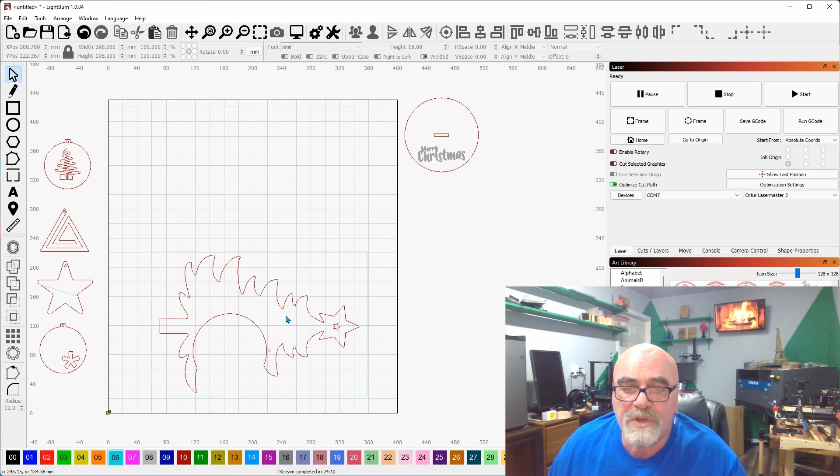All right, so here we are. Now this is the file that you'll get for free when you download it. This is the Christmas tree here, the standalone Christmas tree. This is the base up here. This is a little etching that says Merry Christmas, and engraving.

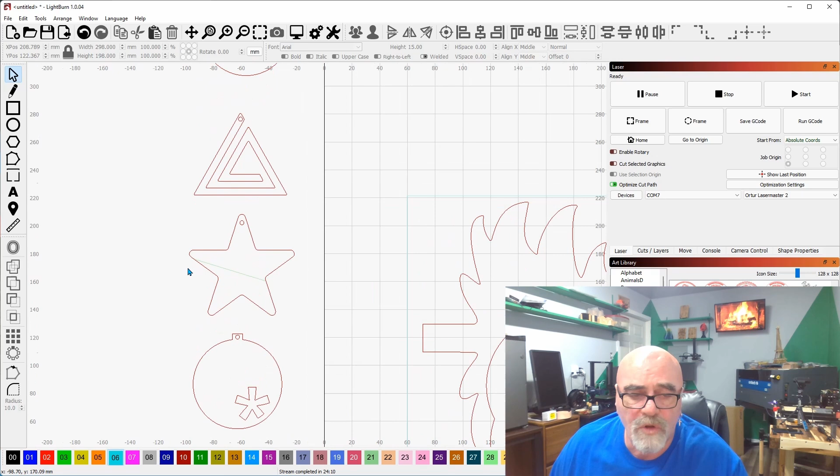Everything in red is going to be cut out. Let me move this over a little bit. I'm going to hold down my mouse wheel and drag to move the bed around. And if I zoom in by rolling my mouse wheel up, you'll see there's a little green line right here on this ornament, the star.

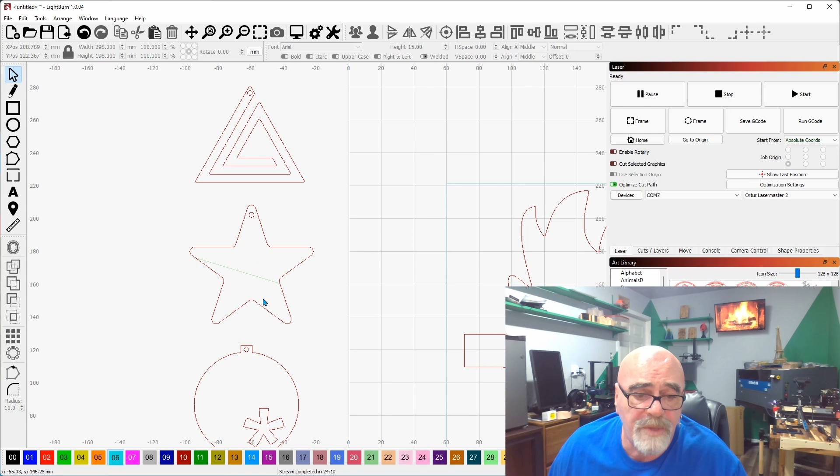That's just a reference point. It's going to engrave, but it's just a reference point so that you can paint the top green and the bottom red, or you can use some flocking in different colors or whatever. These little holes here are 3mm. These are the ornaments, you can choose from whichever one that you want.

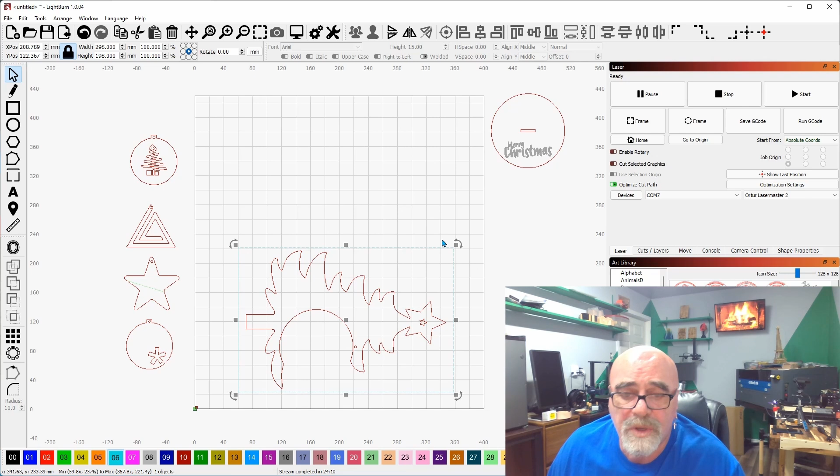Here you'll see that I've got this arranged sideways, and also you'll see that this box right here is my framing box. I'm going to include this with the actual download so that you have it as well. And the best size wood that I've found here is 300 by 200mm basswood.

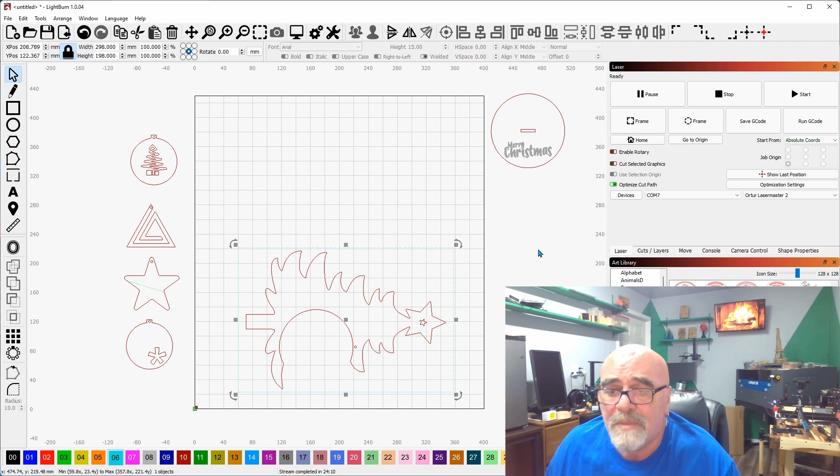So if you look up here in the top where it says width and height, I've set it to 298 by 198 to give me a little bit of extra room. And then when it's time to frame, I'll run — I have the cuts and layers set over here.

And if I right click on this, you'll see that flash. This one here is set at 1400 speed and 0.05 power, which is nothing — okay, it's enough to turn on the laser so that you can see. I also have this set to 3 passes.

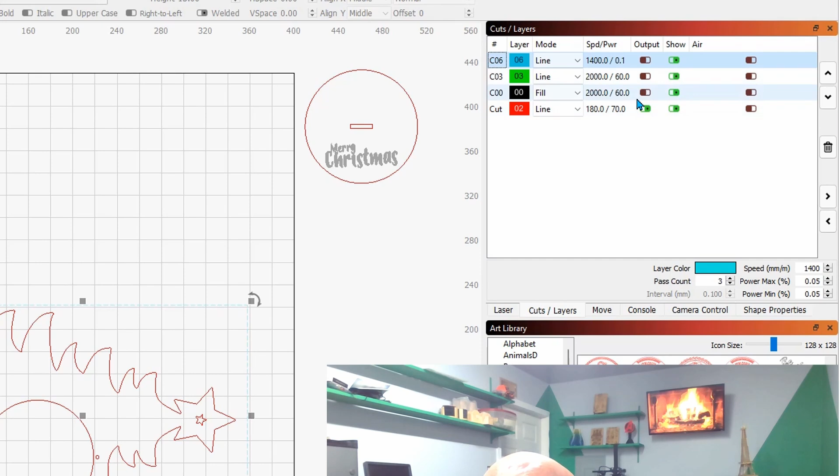So what'll happen is, with all of the outputs turned off, just this one output turned on for this line, I'll start the job on the laser and it'll start moving around, just barely lighting up the laser, and I'll know how to position the wood.

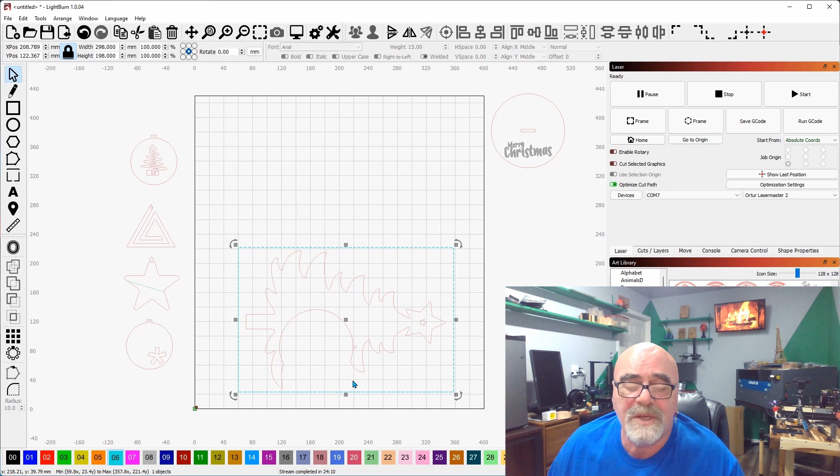I have a pretty good idea of where to put this because I've got my honeycomb bed and I know exactly where this is going to be from the grid. So I'm going to go set that up and we're going to get this ready to burn.

Now this will be the first piece right here. And then what I'll do is I'll go ahead and grab this piece, the base. I'll set it on here, get rid of this one. I'll make 2 bases so that I can glue those together. So I know that it's 4mm thick, and that's probably about where you're going to want to be.

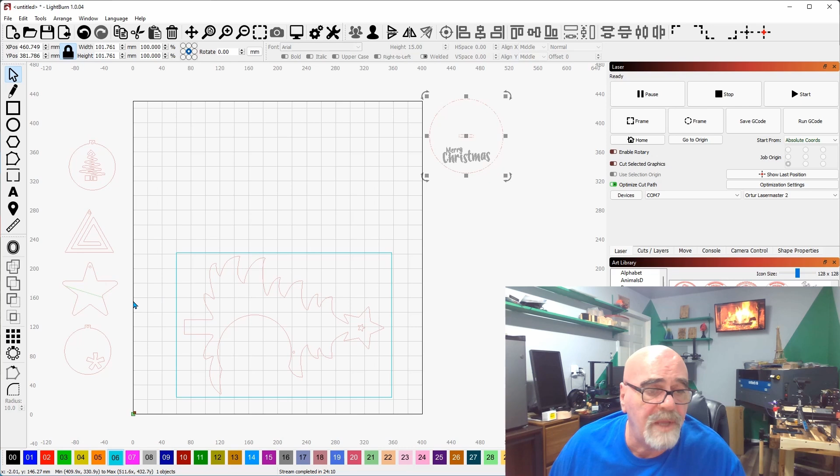And then I'll grab 1 or 2 of the ornaments over here and also put them inside here. So we'll be able to cut the tree first, then we'll cut the 2 bases that we'll glue together, and then we'll cut one of these ornaments. I'm not sure which one I'm going to do yet, maybe I'll do 2 of them.

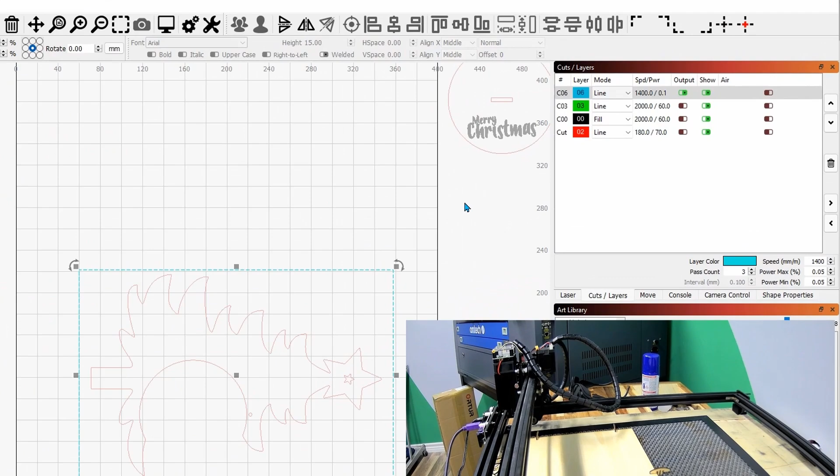So let me go ahead and get that set up and get it ready to burn, and I'll be right back. All right, so I've got the project set up now, and as you can see, I've turned off the output for everything but this line.

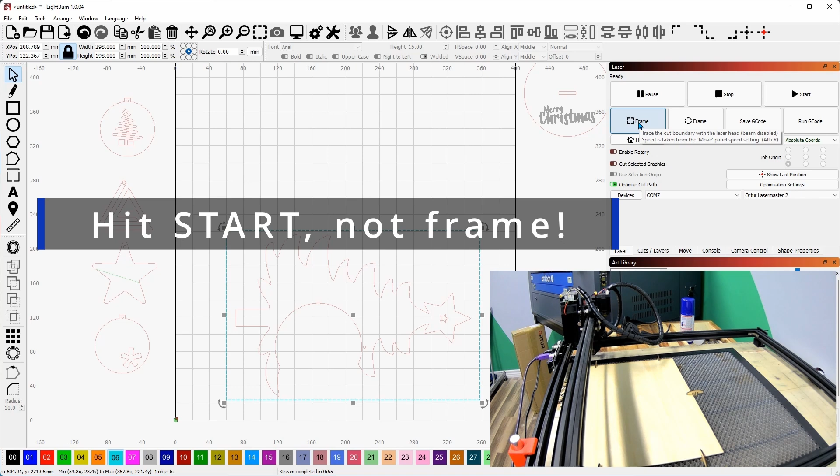If I right click on it, you'll see it flash down here. This is my frame, my 300 by 200, which I actually made 298 by 198 just to be safe. I've gone ahead and put my Christmas tree in here. Now I'm going to come over to the laser and frame it, making sure it's lined up perfectly. I think I've got it pretty well lined up, but let's take a look and see what happens.

Actually, I'm not going to frame it. I'm just going to start the job, because I've set this up in line mode with 3 passes. So let's just go ahead and start the job, and it's at 0.05%, so it's perfect for framing. I'm going to hit start, and let's take a look.

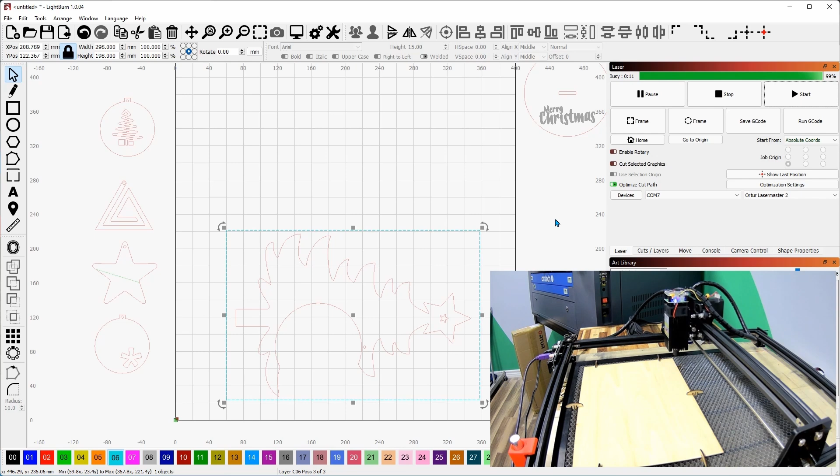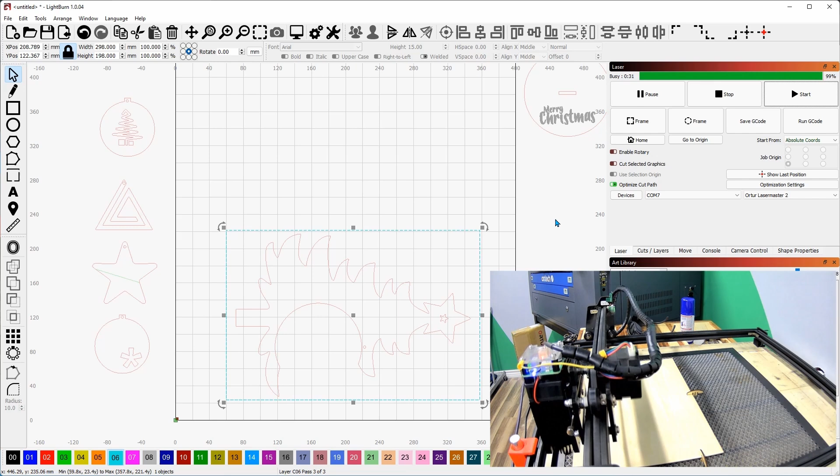All right, so that looks pretty perfect just the way it is. I don't have to do the 3 passes. If I did have to do it, all I would have to do is move the wood right now as it's going around in 3 different passes. I'm going to hit stop, and it's ready to cut right now.

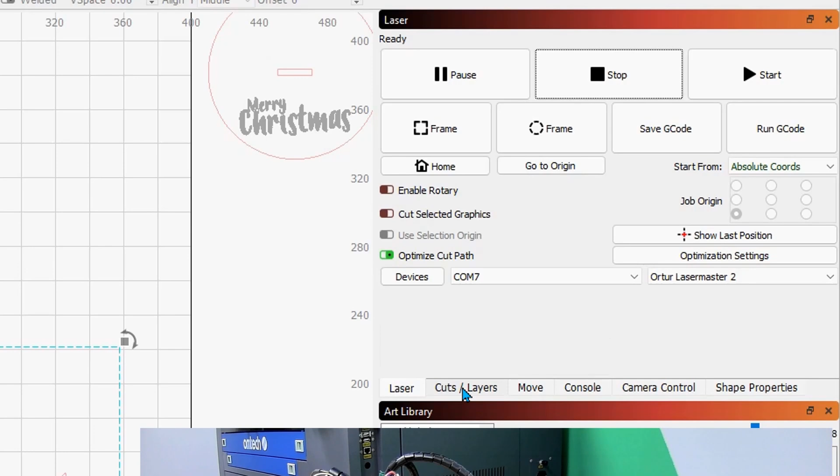So let me come back over here to laser, cuts and layers, and let's turn off the output on that one. And let's turn on the output for the cut, which is going to be this one here. Ignore everything outside the bed because it's not going to do anything at all. So now let's take another look at this.

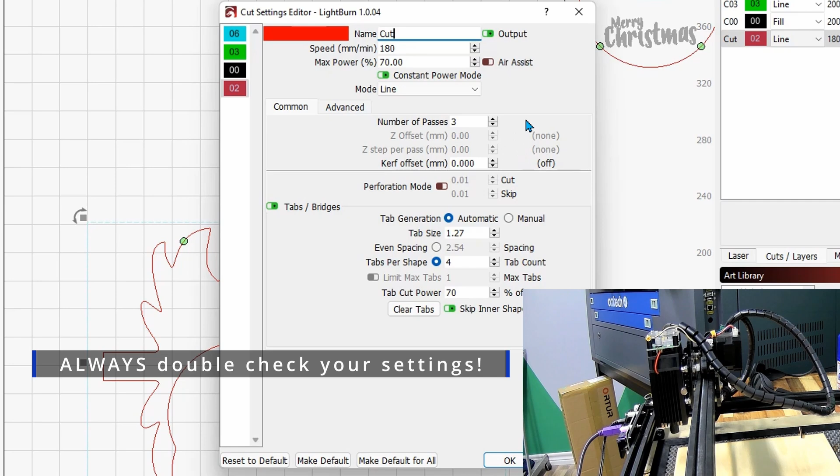So again, I've got 180 and 70 because I've done my power scale already. I've got it on 3 passes because I know that's going to give us a good cut through. And I'm going to turn off tabs and bridges - I don't know why that was on, that's a mistake, that was from a previous job. So now I'm just checking everything to make sure everything's right, and I'm glad that I did because I had tabs and bridges on.

So we'll go ahead and send this to the laser and see what happens. Hopefully it's going to cut out perfectly. Let's hit start and see what happens.

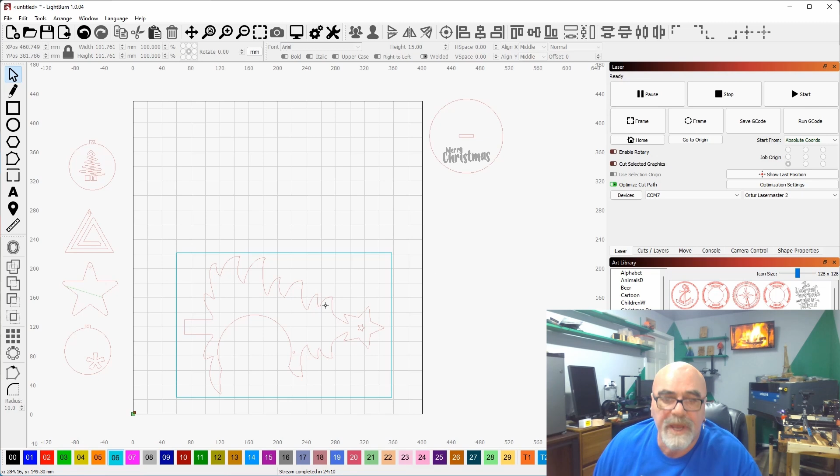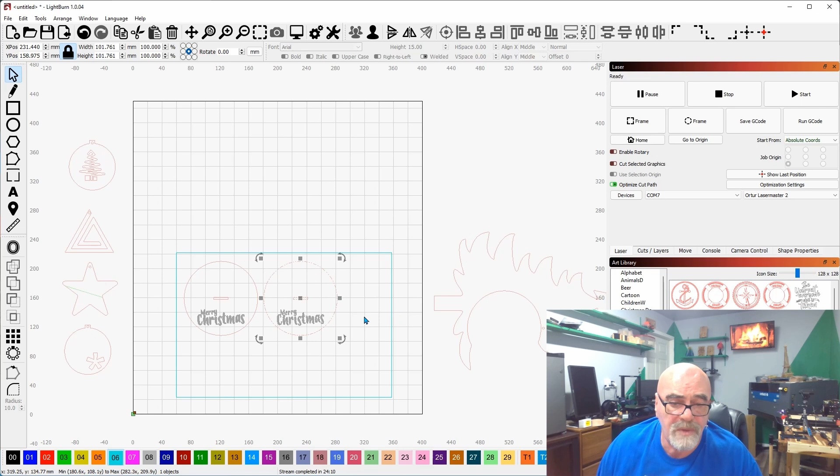All right, so we've got the tree cut out. At this point, what I'm going to do is select the tree and drag that off the workbed. I'm going to come up here and drag the base down here. Now, with it selected, I'm going to press Control and the letter D, and that duplicates it. Now I'm going to use my right arrow key and just right arrow over to the right side. Now I've got my 2 bases.

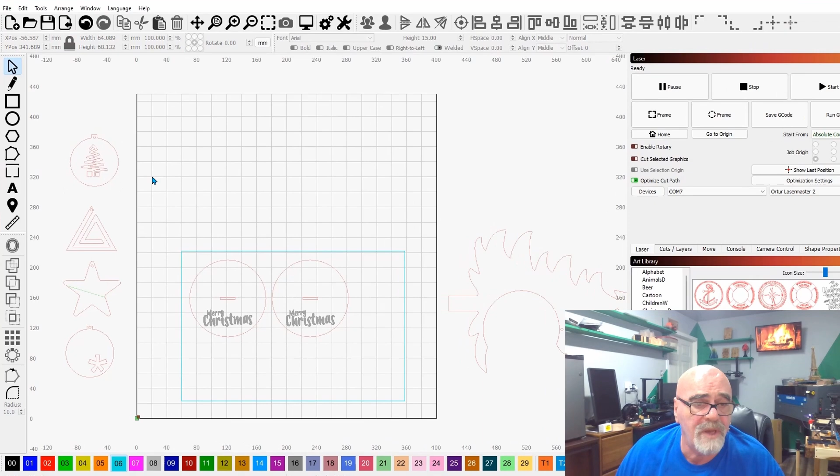So with the 2 bases on the work plane, inside the frame, which is my piece of wood that I've just replaced with a clean piece, I'm going to grab one of the ornaments by selecting it. If I drag from the bottom right to the left, or anywhere from right to left, it'll select the entire ornament. I'm going to drag this over and stick it right about there. Looks good. Maybe I'll take this one and drag it over to about here. And I guess I'll do the third one - why not, we can pick and choose what we want - grab the last one, stick it over here somewhere. Being that we've got the wood, we can pick and choose which one we want.

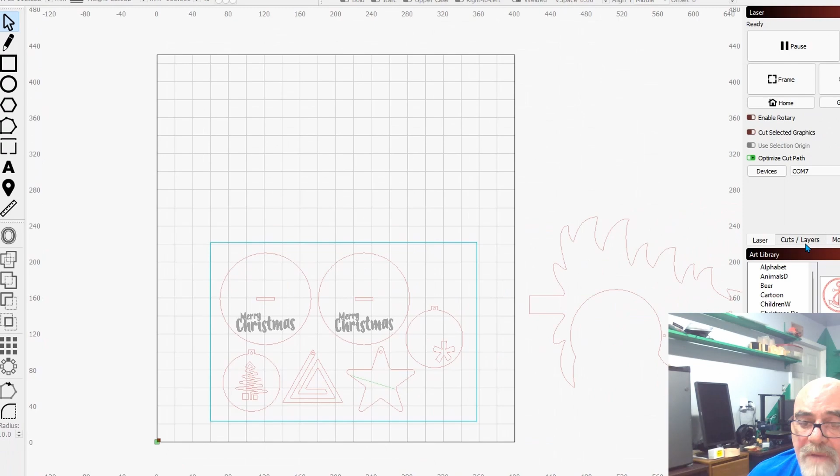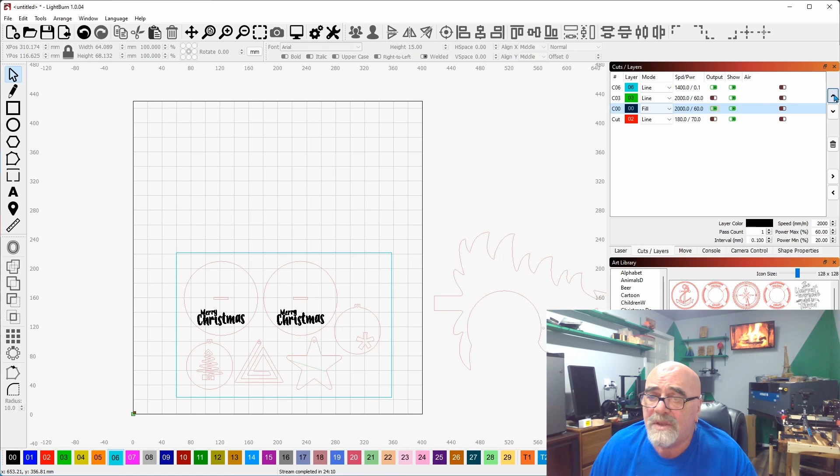So now you can see that the Merry Christmas is grayed out, so we have to come back to cuts and layers. That Merry Christmas one, if I right click here, you'll see it flashes, is turned off. So we have to turn on the output. And now we need to set the priority, so this has to be engraved first. You see it's way down the list here, so we're going to come over to the up arrow and click it until we get it to the top. This way, this will be the first thing that happens. Now, when you download the file, it's not going to remember these cut priorities.

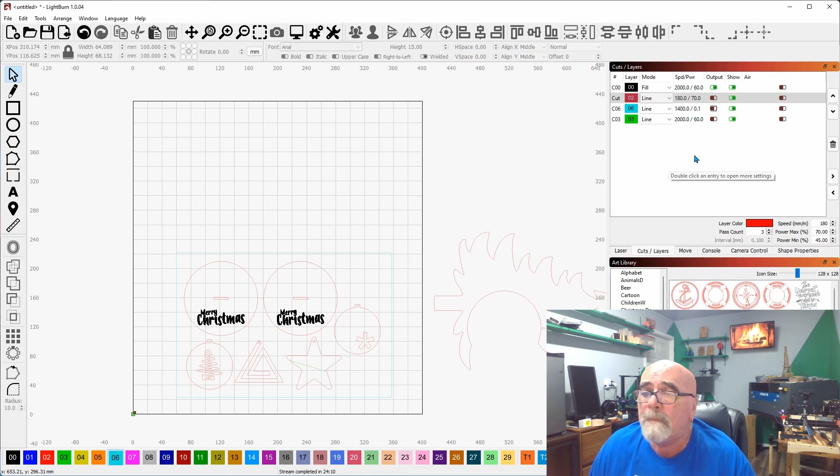You have to set this yourself, so make sure that your engraving is at the top. That's the first thing that happens, then the cut is second. We'll move the cut up into position number 2, and we'll turn this one off because we know we've got it framed perfectly from earlier.

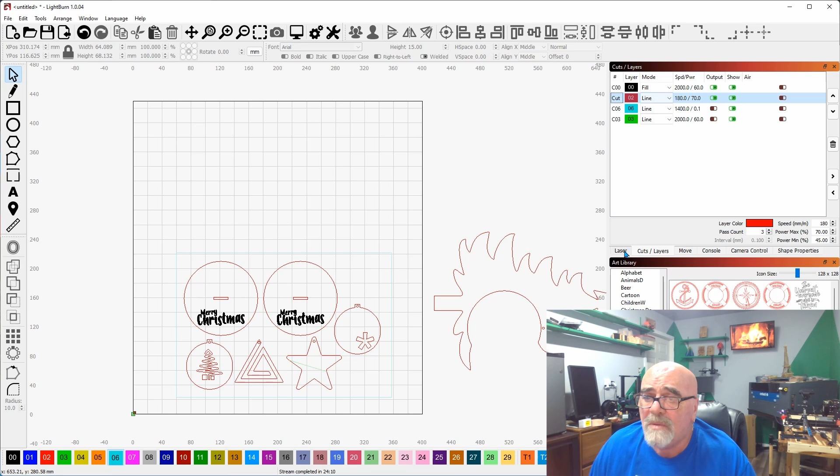So first engrave, then cut. Forgetting about what's on the side here, it doesn't matter - only what's on the workbed is going to actually cut. Then I can come over here to the laser tab and just hit start.

Again, this is the Ortur, the 20 watt, or 5.5 optical output watt laser. I'm using a honeycomb bed just because I have one. I used to use the spike bed - I still have that one.

There, I'm grabbing an extra pair of goggles for my grandson who just came in.

I'm going to speed this up a little bit because I just don't like watching long sped up videos, so I'll kind of skip through this. You can see that the first thing it's doing is the engraving.

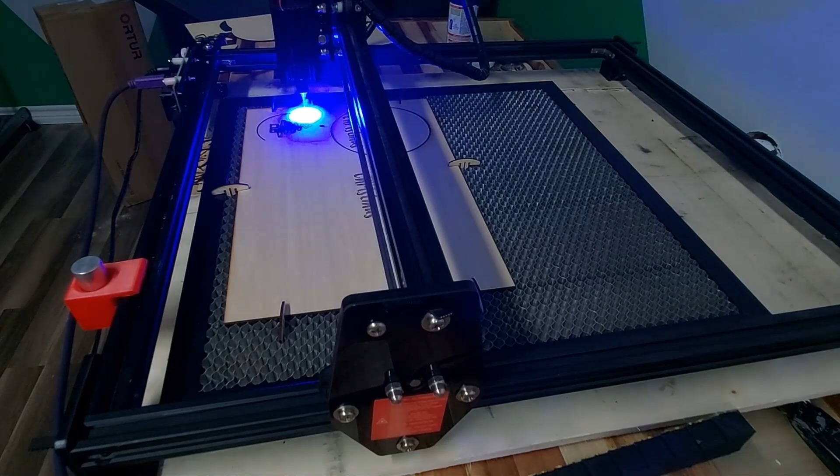Now I do have my exhaust on over here, so you can see that all of the smoke comes back and gets sucked out. I don't smell anything in the shop. This is 1,000 CFMs. On the other side of the shop I have a 4x10 grate with a fresh air inlet. So you have to remember, if you're using an exhaust that vents to the outside, you also have to have an inlet in your shop to let fresh air in.

So I am not using air assist on this laser, and I'm doing that intentionally because I'm going to paint it when I'm finished here. I want the burn to be on there - it kind of mixes with the paint and gives it a nice streaky look instead of a solid color, and I kind of like that. So you don't always have to use air assist; sometimes having the charring adds to the effect.

All right, so this one is almost finished. This was part 1, and then there's a couple more pieces that have to get cut out in part 2. I'll go ahead and let this finish, and there we go.

So now we'll jump over to part 2. This is the continuation, and we'll just skip forward on this one. One of the nice things about having this honeycomb bed is that when I swap out the wood, all I do is pull this pin here, pull this pin here, and this pin here.

And then I can slide the wood out. When I do that, I hold down on the grate, and these other pins stay in place, so I don't have to frame it again. I just slide the new piece in and put these 3 pins back, and it's perfectly ready for the next cut.

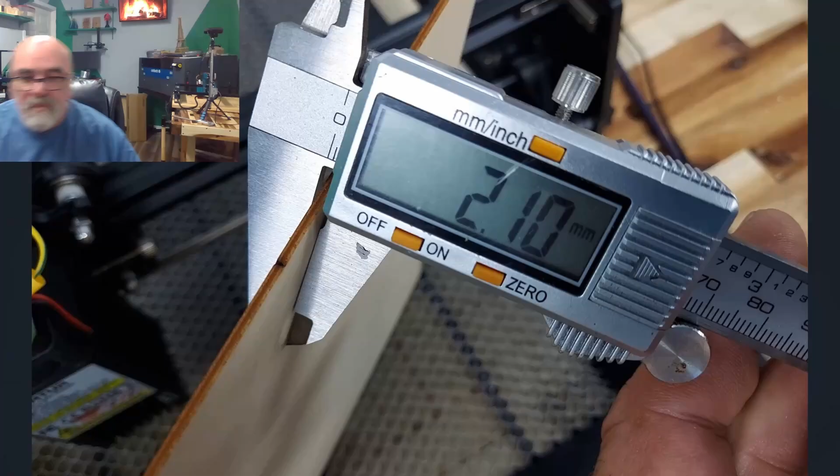And that's it for the actual cutting itself. So now here comes the fun part — we're going to skip right into the painting and the decorating. And let's not skip any steps here. One of the things a lot of my subscribers say in the comments is that I don't skip steps, so I don't want to skip any steps here.

So the very first step I did was measure the thickness of the wood, which was anywhere from 2.05 to 2.13. I just picked a number in between, and 2.10 kept coming up, so I figured that was a pretty good number to use. I'm going to say this particular wood is 2.1 millimeters thick.

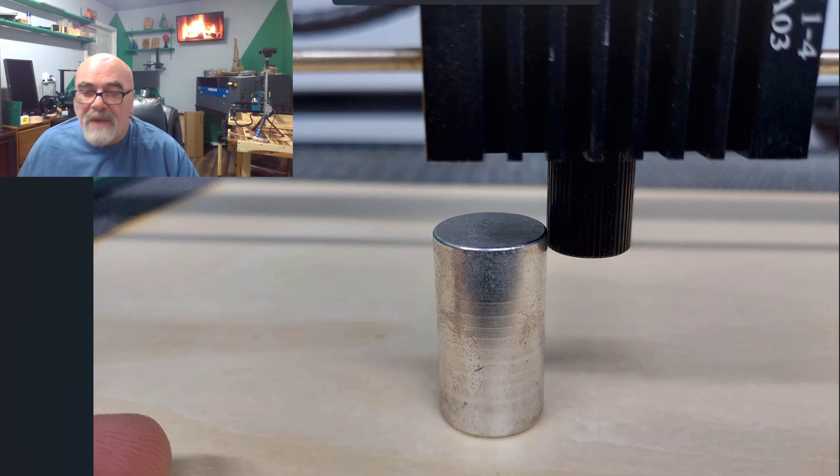The second step I did — now I'm using the LU1-4 laser, which is the original LaserMaster 2 diode laser. It comes with this 29 and a half millimeter steel focus adjuster.

So what I did was take 2 millimeters — I can't say 2.1, can't really get to that accurately, but this is about 2 millimeters right here. I lowered the focus down about 2 millimeters so I could cut to the bottom of the wood. Now if you're using like 4 millimeter wood, 2 millimeters is still good. So I'm cutting to the bottom, but usually you want to focus about halfway through the wood. This way you'll get a good clean burn, and make sure your laser can see all the way to the bottom. That's why I'm focused a little lower here, 2 millimeters lower.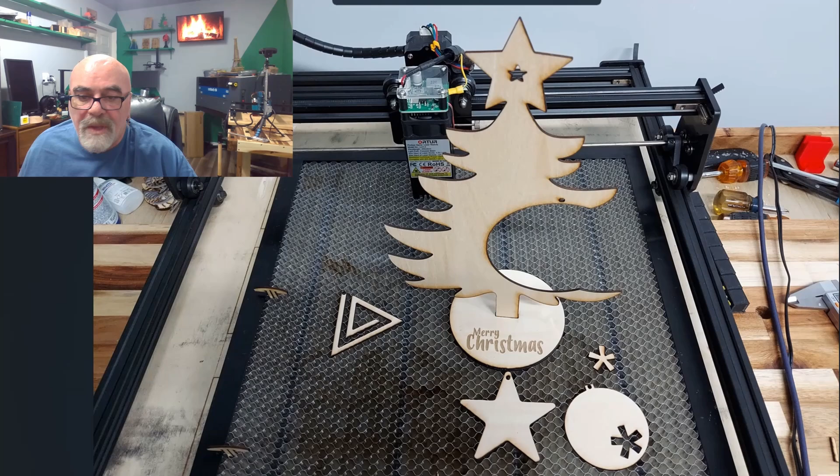So here is the actual dry fit. Once I got all the parts cut out, I did a quick dry fit. I found out that my rectangle here was too wide, so I had to take a small leftover piece and wedge it in the back. The dry fit was just perfect. I wound up using some CA glue and activator to make sure it was held tightly in place.

Here you can see this hole is a little bit too close to the top — it still works, it's not a problem. But in the template, if you're going to download it, I went ahead and lowered this a little bit so that won't be a problem in the future. This is the star, this little triangular thing here.

And here's where I got the cool idea. I really like this because this part here is a throwaway, right? No, it's not — I repurposed this instead of throwing it away. So the cutout piece from here, I went ahead and repurposed, and I'll show you that in a minute.

Now I did have a problem on this one. Most of it cut out pretty good, but on the right side where it's moving in both the X and Y directions at the same time, I think that's a belt adjustment error on my part because I don't have the belts adjusted perfectly on this. I did just do maintenance on this — I don't understand, but I'll have to tighten this right side belt, it looks like.